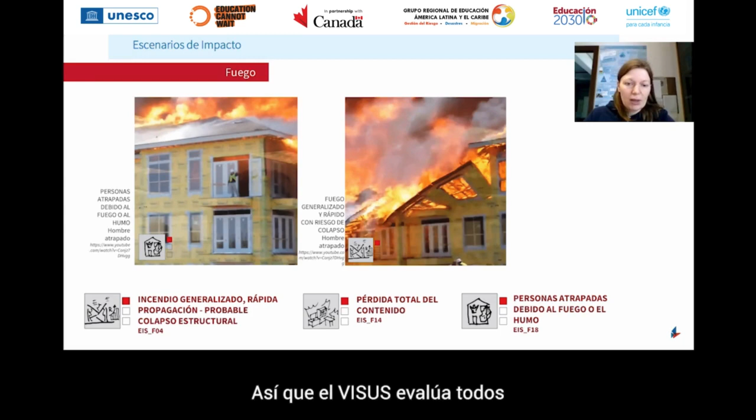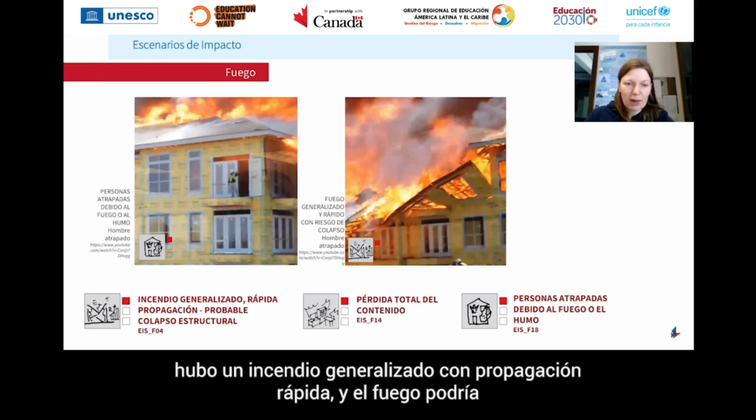Here this person is trapped inside the building, in a very dangerous situation, and so VISUS assesses all these cases, starting from what could happen, and assesses the potential expected impact scenarios. So in this case, because this building was made of wood, a wood structure, there was widespread fire with rapid propagation, and the fire caused a structural collapse, as you can see from the second image here.

At the bottom, very small, you can see that the person here was rescued by rescue people. And obviously in these cases you have the total loss of contents and, as we saw at the beginning, the presence of trapped people, and it was a very lucky case in which this person was saved at the very last moment by the rescue team.

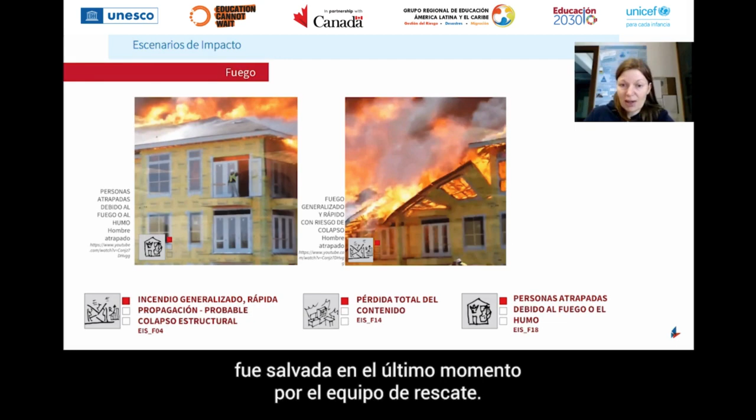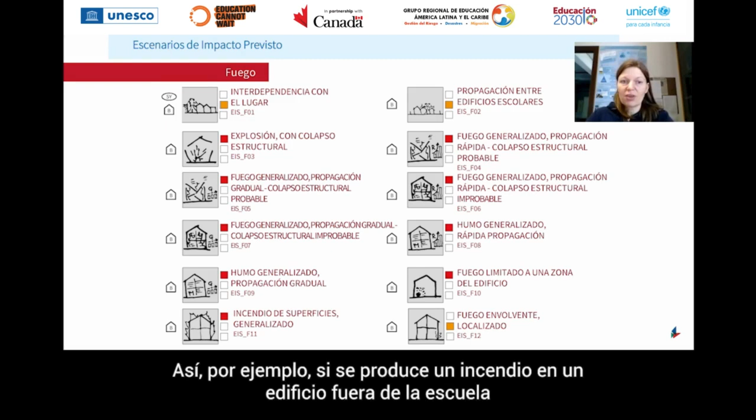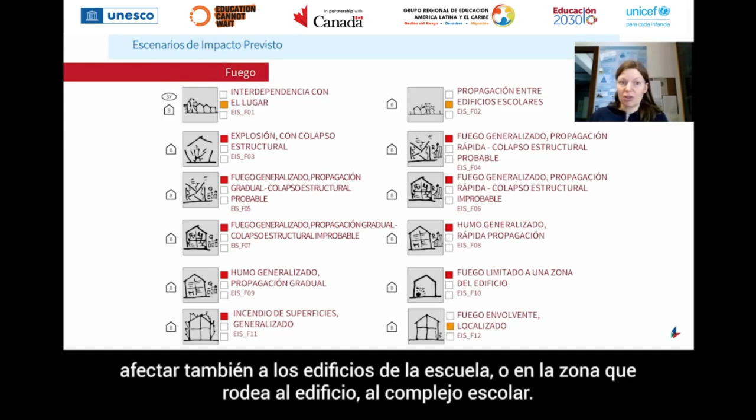So the VISUS methodology assesses several expected impact scenarios for the fire hazard, and assesses the potential interdependence of the school complex with the site. So, for example, if there is a fire in a building outside the school complex, if this fire could also affect the school buildings, or for example in case of a wildfire in the area that surrounds the school complex. Or if there is the potential propagation of fires among the school buildings, and so a very simple fire propagates among all the buildings in the school.

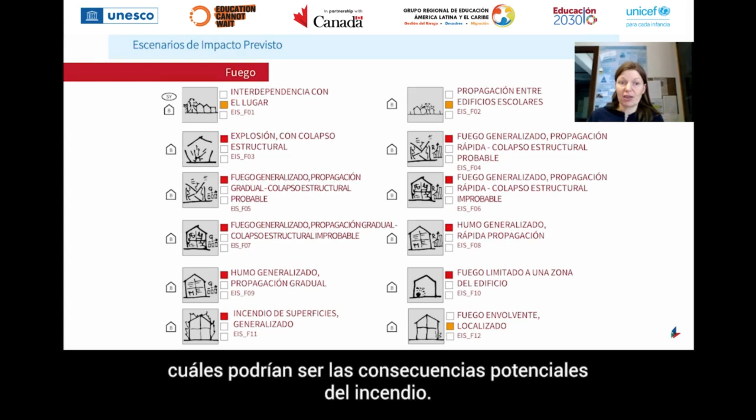Concerning each school building, the VISUS methodology assesses which could be the potential fire consequences. So, for example, if there can be an explosion with structural collapse because of the contents or the structure of the building, if there can be widespread fire with rapid propagation, as we saw in the previous image, with a very probable structural collapse, or if there is a widespread fire but with gradual propagation, because the conditions of the building allow for a gradual propagation of the fire.

And in this case, it's important to distinguish the rapid propagation from the gradual propagation, because there is the possibility for fire rescue personnel to act on the fire if it has a gradual propagation, so to limit the effects of the fire. It is important also to assess the smoke propagation, and if the fire is, for example, localized on the envelope, because the envelope of the structure has combustible elements.

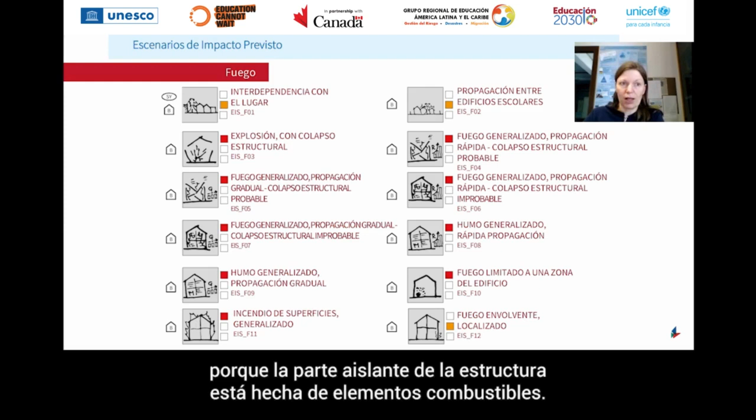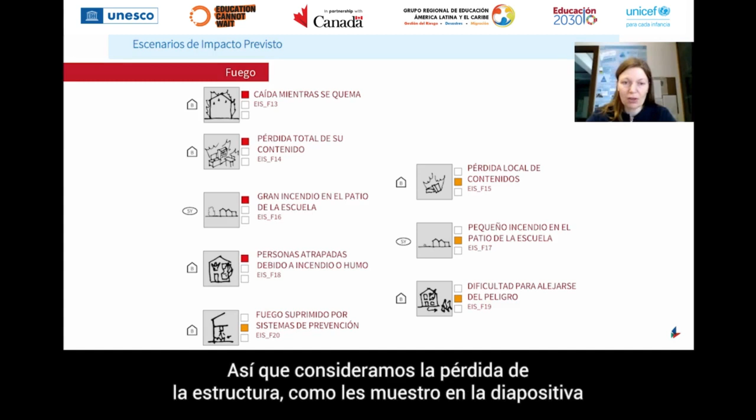Also, in this slide, there are other expected impact scenarios for fire. Continuing, we consider the loss of the structure, as I showed you in the previous slide, but also the loss of content in the structure, because this is also important. And the presence of a large fire in the schoolyard, the problem that people can be trapped in the school because of fire, cannot reach an exit, and so persons can be trapped due to fire or smoke. Or if there are protection systems, the fire could be suppressed by them.

So overall, for the fire hazard evaluation, we consider the following factors: the presence of ignition sources, the presence of protections from the ignition sources, but the ignition sources trigger the fire or an explosion if there are combustible elements. For example, the envelope of the building could be combustible in case of a wood envelope. But there could also be protection systems that suppress the fire before it causes severe consequences.

Then it is important to consider the functionality effects, so the egress of persons both from buildings and from the schoolyard, and also how the fire could propagate in the school complex, so among buildings or from the schoolyard to buildings. So, considering the location, we assessed the potential interdependence with the context, and we assessed the presence of potential natural hazards. So if the school is within a forest, there could be potential wildfire interaction with the school.

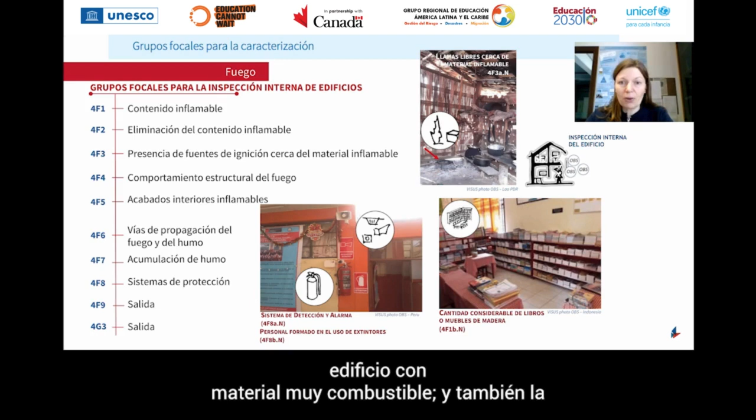Finally, internally, it's important to consider the combustible contents, their disposal, if they are very close or if they are separated so fire cannot spread from one to the other. The presence of ignition sources near combustible materials, such as in the example in the picture above, where you can see a place for a small fire inside the building with a very combustible material.

And also the presence of alarm system and the fact that there is a person trained to use the extinguisher or the fire suppression systems. The VISUS methodology assesses also the water-related hazards, considering therefore the potential floods, but also tsunami or other water-related hazards that could impact a school complex.

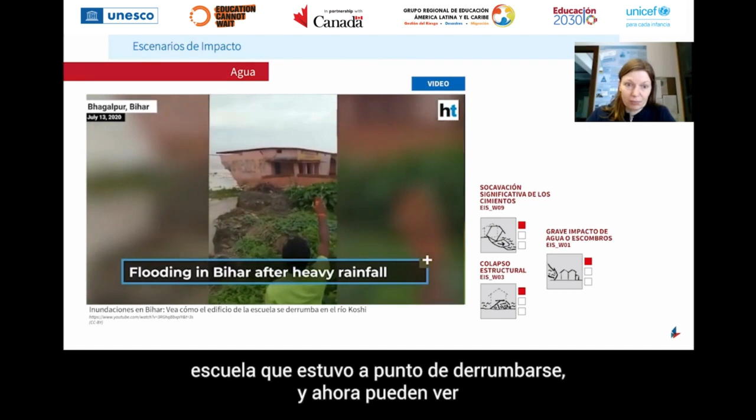For the water-related hazard, the VISUS methodology considers different expected impact scenarios. So we consider the impact of water and debris on the school complex. The flood water can impact on the school complex, but the flood water can have different velocities and could bring also debris that could hit the schools and the structure of the schools.

Then there could be the structural collapse of the school buildings, or the school buildings could be damaged. In case of specific types of buildings, the building could be displaced, and so this could cause problems in the school or the buildings. Let's consider, for example, a container. It could be uplifted and move in another position.

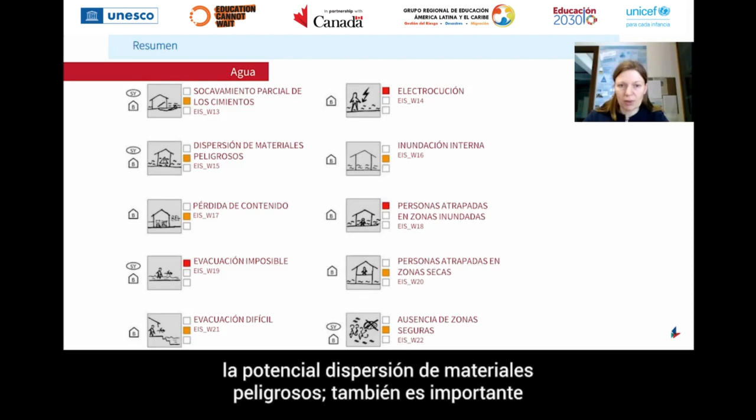And very important are the non-structural effects of floods that could, for example, cause the potential electrocution of a person because of electrical contacts, or the potential dispersion of hazardous material. And also it is important to consider persons trapped in flooded areas or persons trapped in dry areas that are expecting rescue from outside.

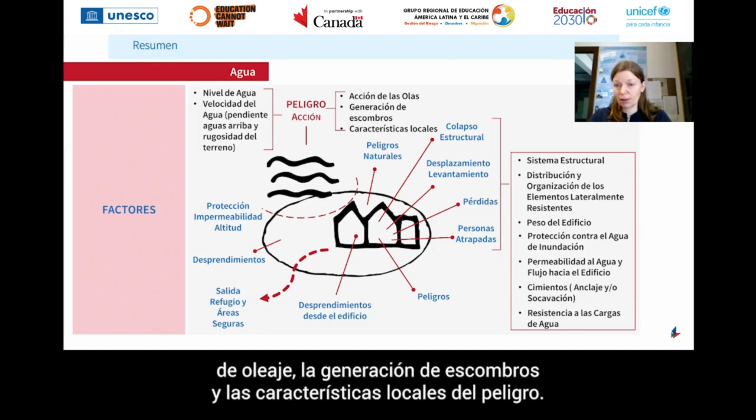In this slide, you can find summarized the main factors that the VISUS methodology assesses for the water-related hazards. So the VISUS methodology assesses the hazard action, so the water action on the school complex, considering the water depth, the water velocity, the potential presence of wave action, the debris generation, and the local characteristic of the hazard. Then it is important also to consider the protection from these water actions, but also the presence of other natural hazards, such as landslides, which are often triggered by water-related hazards.

And then for the buildings, it's important to assess the potential problems connected to structural collapses, displacements, the presence of losses inside the building, the presence of people trapped inside the buildings, or, for example, landslides both in the schoolyard or in the school buildings, and also the egress, the presence of shelters and safe areas, as well as the presence of early warning systems that warn students and professors and personnel in the school to leave the school before an event.

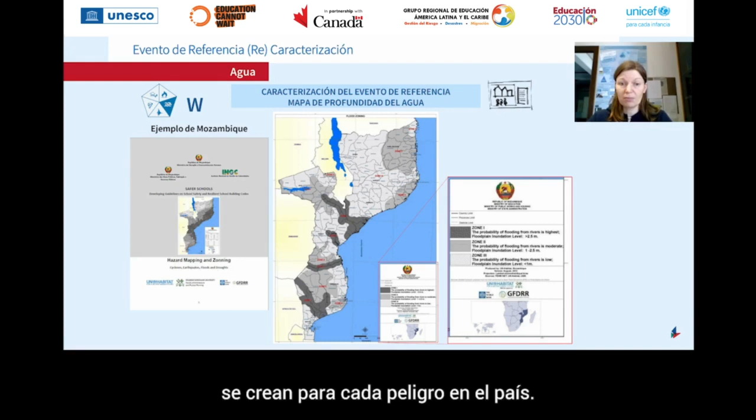For the hazard, it can be defined considering past events, as we saw for other hazards, but also considering the hazard maps that are created for each hazard in the country. So if these maps exist, for example, this is a map from a document with the water depth map for Mozambique, they can be used for the assessment of the expected hazard.

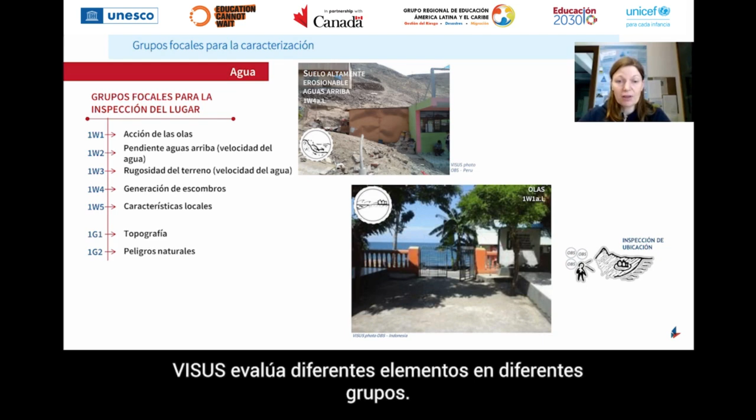For the water flood level, the VISUS methodology assesses different elements in different groups. For the location inspection, we consider the wave action and the upstream slope of the site, in order to assess the water velocity, because water velocity is a very important parameter for assessing how strong the water hazard is, but very often it is not defined by hazard maps. So it's possible just to have an indication of the potential water velocity considering the upstream slope, and to define what could be the velocity.

Also, the water velocity can be modified by the land roughness. So if inside a city there are no straight paths and there are buildings, the water velocity could be reduced. Instead, on open lands, the water velocity could be very fast. It's also important to assess the debris generation, because debris could impact buildings and cause very dangerous hits, along with the local characteristics of the site, including topography and the presence of natural hazards such as landslides.

For considering the schoolyard, it's important to see if the school complex is protected from water. For example, if the school is on an elevated site, even if there is a specific flood level, it cannot reach the school, so the school is a safe place because the water level does not reach it. Obviously, in this case, children are in a difficult situation because they are blocked inside the school and cannot leave until the rescue team saves them.

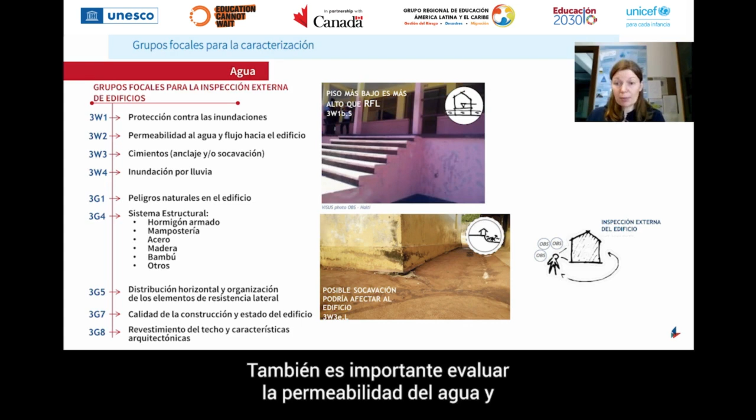But it's also important to assess the water permeability, and whether there is a flood flow into the building or if the flood flow is denied, because this changes the impact of the water on the structure. If the building is impermeable, the water cannot enter the school and acts only on one side of the walls, which could cause collapses. On the other hand, if water can enter into the building, there is no single effect on one side, but the water load is on both sides.

This does not affect the resistance of the wall, because there is no strong force on it, but obviously you have water inside the building, and this causes other problems.

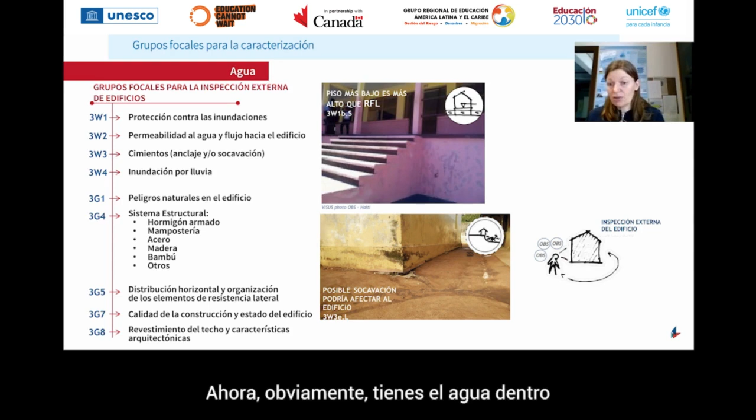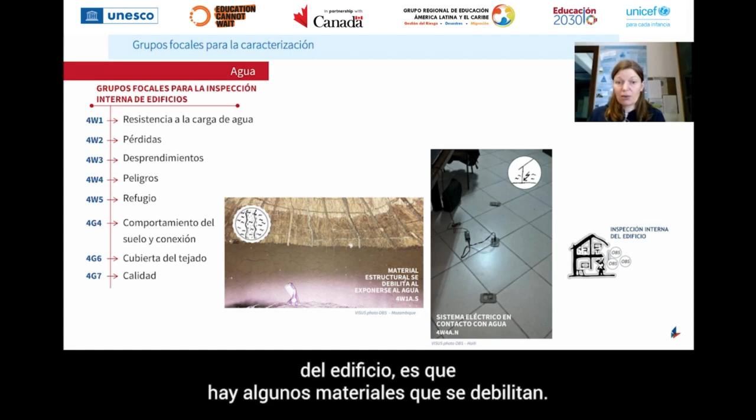Another problem related to the water, considering the structure of the building, is that there are some materials that weaken when exposed to water. For example, a typical building built with mud, in case of flood, weakens and collapses immediately.

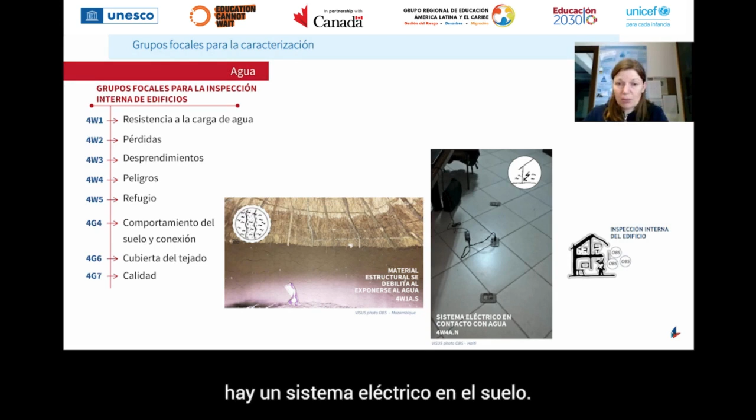But there are also other important elements, for example non-structural elements. There could be contact with water of the electrical system, causing potential electrocution of persons in the building. This happens very often, also recently, because of poor attention of persons on this. For example, in this image, you can see electrical systems on the ground, and it's very simple that in this case there could be electrocution of persons in case of flood.

After the recent COVID-19 pandemic, we decided to change the VISUS methodology to also account for biological hazards. This part is still under development and has not been tested in projects because it's very new. But the VISUS methodology aims to assess how the physical environment of schools is important for the biological hazard assessment.

In particular, for the biological hazard, we assess how the physical environment of the school buildings and of the schoolyard limits or not the potential diffusion of biological hazard, in this case of pandemic, because of the characteristics of the structure.

So we assess the location, the schoolyard, looking if there is access control of the persons and if there are potential zonations, so separation of persons and control of persons that enter into the school.

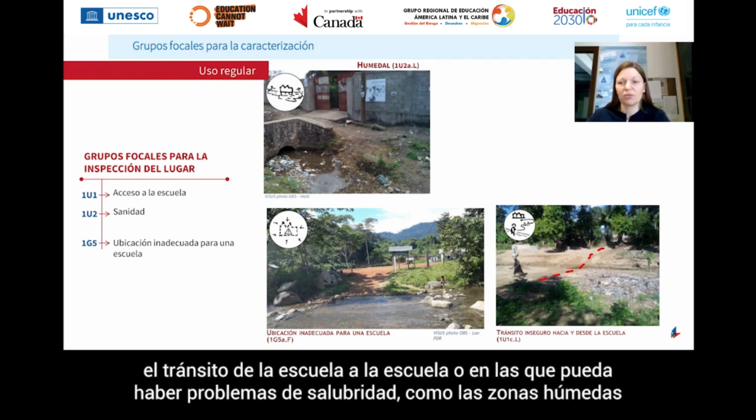But also in the schoolyard there could be problems and children could be affected by dangerous situations during everyday use.

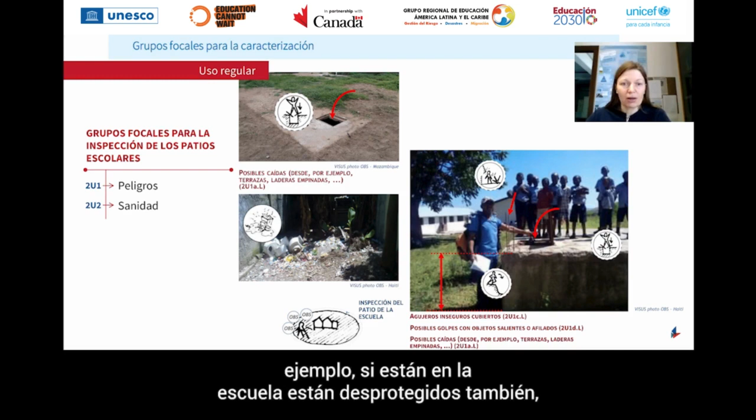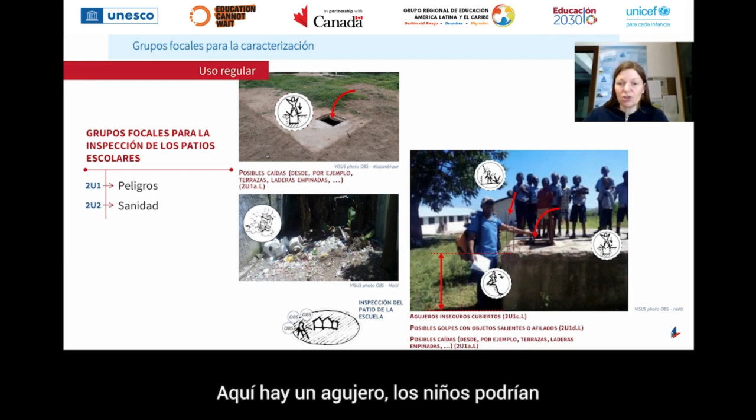So for example, if in the schoolyard there are unprotected holes, such as in this example, children could fall inside, or if there are unhealthy situations, considering for example unrestricted waste collection, or such as in this case, there is a hole here, children could jump, could impact on these irons here that are unprotected, and also could fall from this height and hurt themselves.

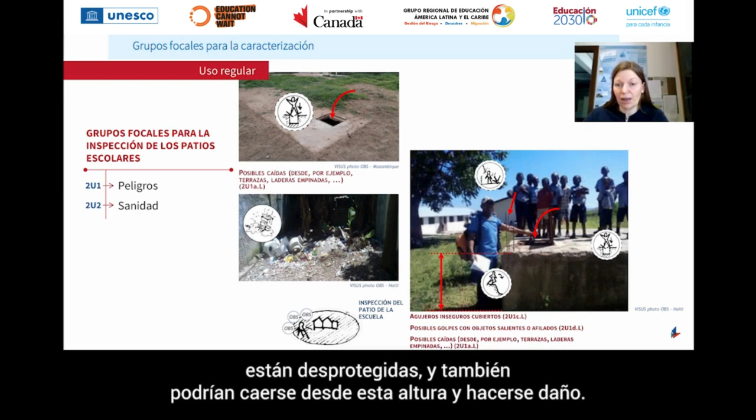Considering school buildings, also there are plenty of situations where children can hurt themselves. So we consider situations where children could bump or hit some objects, but also situations where the structure is very weak for gravity loads.

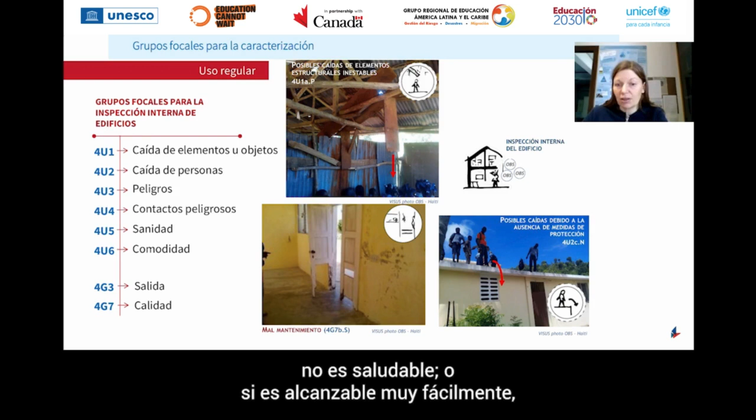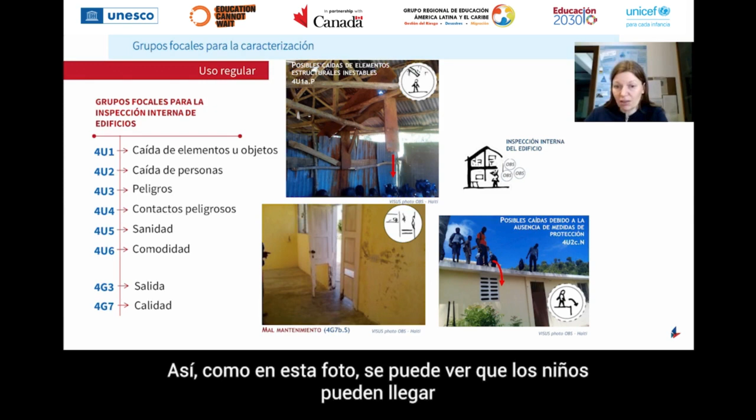Or in case of poor maintenance, if there is mold inside the building, it's not healthy. Or there could be very easily reachable places that are very high with no protective measures from falls. As in this picture, you can see children can very easily reach this roof, but there are no protection measures and they can fall.

Finally, as I told you at the beginning, the VISUS methodology assesses also the status of the school complex. So it's a complementary evaluation, not for safety assessment, but one that provides decision makers with further information concerning the school complex, allowing them to take decisions based on specific criteria.

For the status evaluation, the VISUS methodology assesses different elements: accessibility, the typology of content and equipment of the school, water and sanitation conditions, comfort conditions, security conditions of the school complex and buildings, the presence of constraints—for example, if the building is simply reachable by site construction personnel—and the maintenance of the school buildings and school complex overall.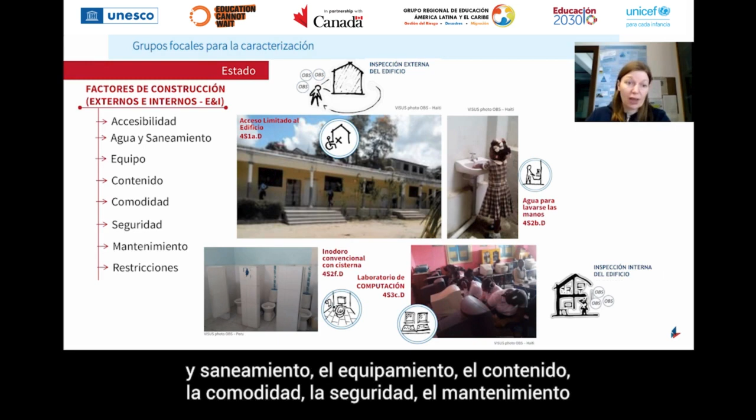For internal factors, the VISUS methodology assesses access to the buildings for people with mobility impairments, water and sanitation conditions, equipment, content, comfort, security, maintenance, and constraints—such as constraints for the installation of site constructions.

Here in the example you can see the presence of hand washing facility elements, the presence of specific typologies of toilets—in this case conventional flush toilets—and the presence of a computer laboratory as content of the school.

All the status conditions assessed by the VISUS methodology provide information to decision makers in order to assess which schools to prioritize for safety assessment upgrading, because the content and status of the school are also important for this assessment and for taking decisions.